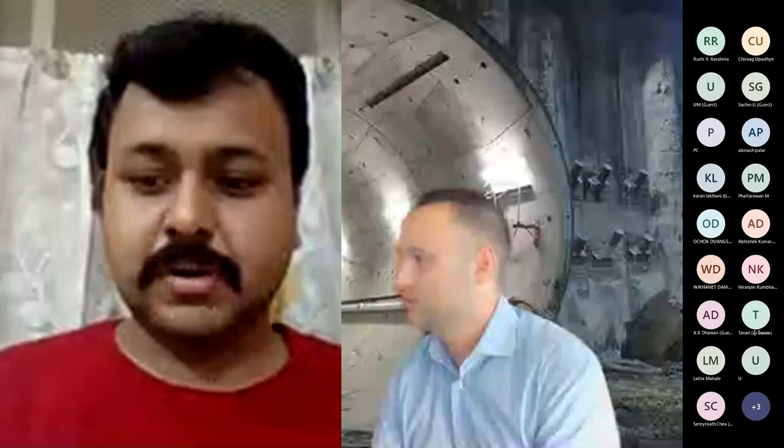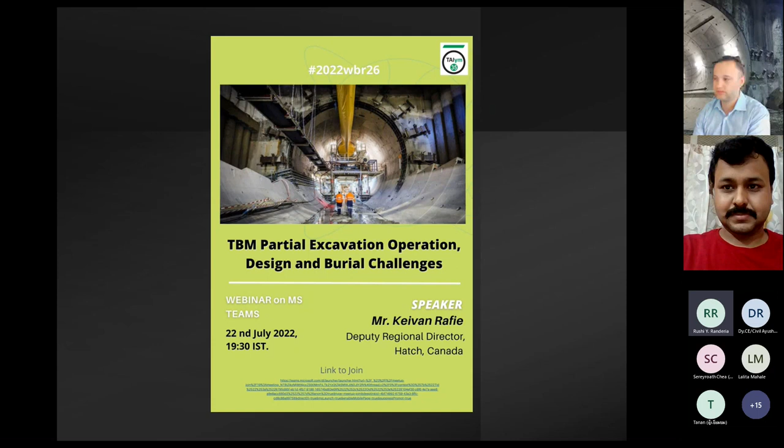So can we start, or should we wait a couple minutes? It's 7:37, so we'll start at 7:40. Oh wait, 7:37, only two minutes away. It's 7:37 PM IST because it's morning in Vancouver. Can you see the page at the moment? Yeah, the poster is visible, that's the title. I'll leave it on this.

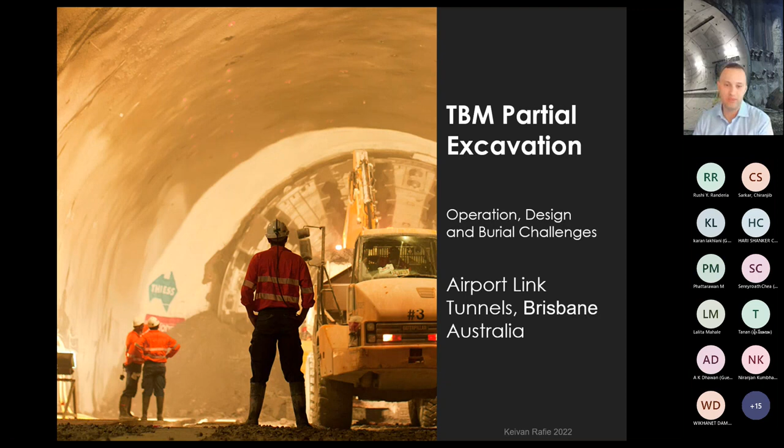Here is a nicer view of Brisbane downtown at nighttime. The south end of the project starts just behind these buildings.

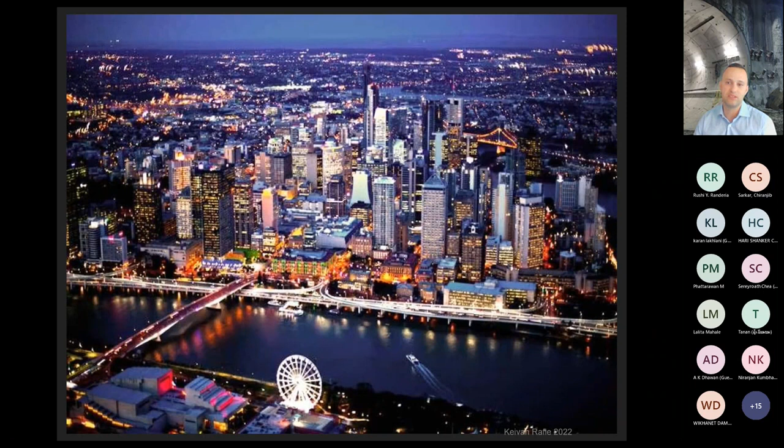In 2008, the government announced that the JV composed of the Macquarie Group, Thiess, and John Holland had been selected for the Brisbane Airport Link. The project involved a total of 15 kilometers of tunneling, including main road with 6 kilometers of twin tunnels, busway tunnels, and connecting on and off ramps, as well as 25 bridges, resulting in over 7 kilometers of new road.

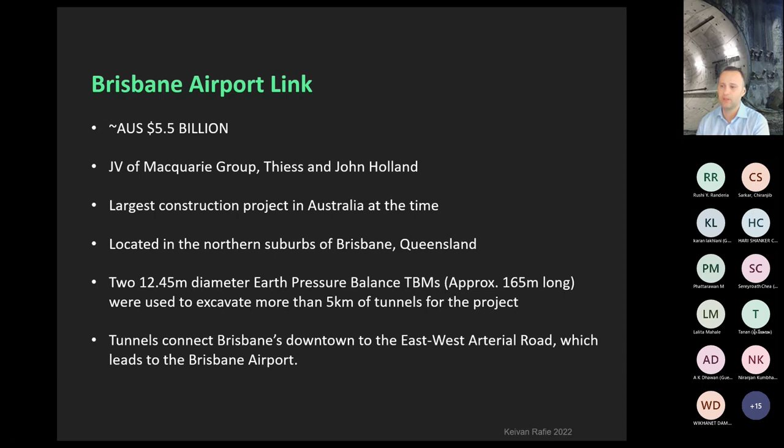Now, to focus on the title of this presentation, let's look at the area where partial excavation was performed. Here's the general map of the project. Bowen Hills in the south is just north of downtown, and Toombul in the northeast is where the airport is located.

Around the end of 2008, tunneling first commenced on the project with drill and blast excavation at Bowen Hills, and also road headers in Kedron for entry and exit ramps. TBMs were launched at Toombul to mine in the southwest direction, passing the North Caverns in the Kedron area, and finishing by breaking through the South Kedron Caverns for the second time in their journey.

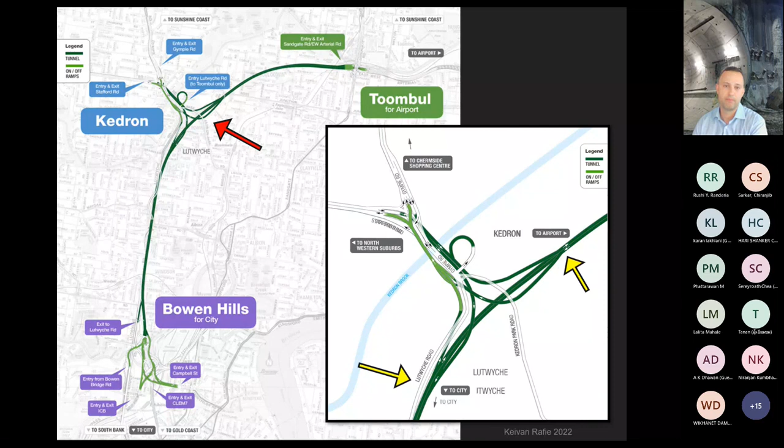Here's a 3D model of the North Caverns. As discussed, along the alignment, both TBMs were required to pass through the North Cavern at Kedron, which had been excavated through the sequential excavation method by road headers or drill and blast for the base, shown by the yellow arrow here. These large caverns were designed to connect the entry and exit ramps about halfway along the tunnel.

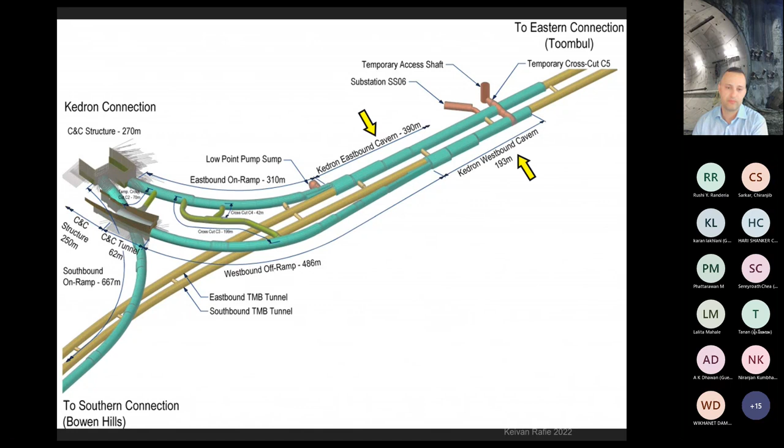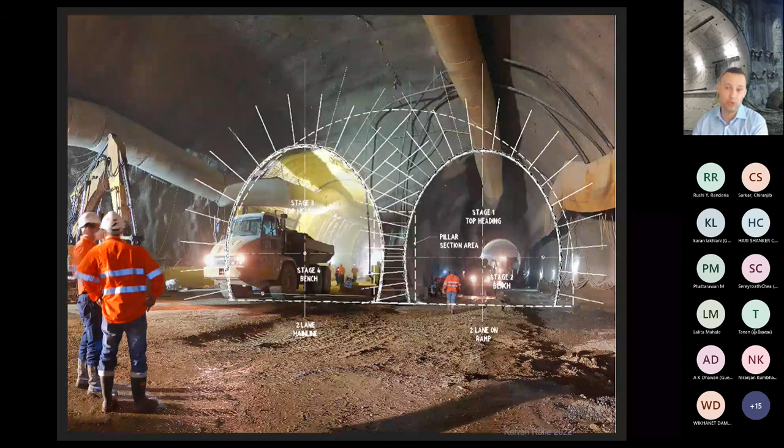Here is a view of a two-lane ramp joining a two-lane main line tunnel in the Kedron area. That's where people who want to go to the airport go straight, and if you want to take the off-ramp, you exit there.

Ground conditions for the TBM drives consisted of a fairly complex geological setting. It comprised alluvium, sedimentary materials, carbonaceous siltstones, and conglomerates underlain by a tuff called Brisbane tuff. The groundwater along the alignment comprised two main aquifers and stood around 35 meters above tunnel invert on average.

Each TBM was designed for 2.4 kilometers of tunnel excavation with a minimum curve radius of 750 meters and a working pressure of 4.5 bar.

The cutter heads had a bore diameter of approximately 12.5 meters and each weighed about 200 tons. The cutter head tools consisted of disc cutters for the hard rock portion of the drive, and scrapers and buckets to deal with the soft ground. The TBMs had 38 main thrust cylinders, 19 rams in total, with 2.8 meters of stroke and 90 meganewtons of thrust force.

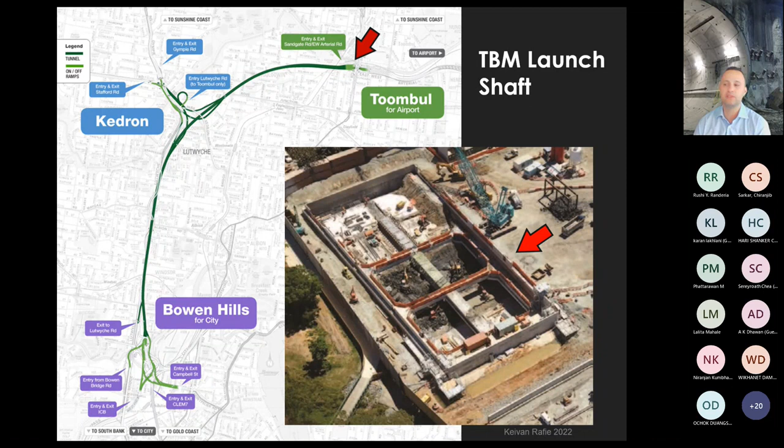The two TBMs began their approximately 2.5 kilometer long drive, going southwest from Toombul towards the Kedron cavern. What you see in the picture is the TBM just launched. About 200 meters of it has gone in, and you can see the last gantry, which is still very close to the portal.

Here's again the 3D figure we had before, now showing where the TBMs had to break through the already excavated caverns with the STM method, shown in yellow, and then where they needed to relaunch for the second round of full face excavation, shown in green.

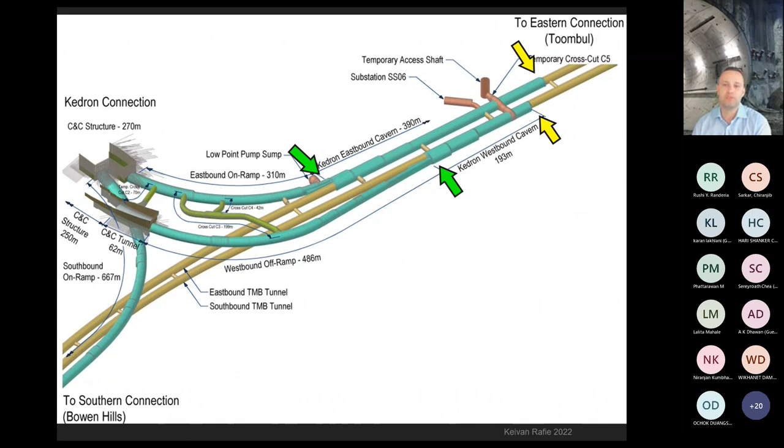The first option was to just slide the TBM through the caverns on the cradle and rails. Another option was to disassemble the whole TBM, move the parts, and then put the pieces back together. The third option involved partial excavation, which is the topic of this presentation, in which the TBMs would excavate the invert of the cavern.

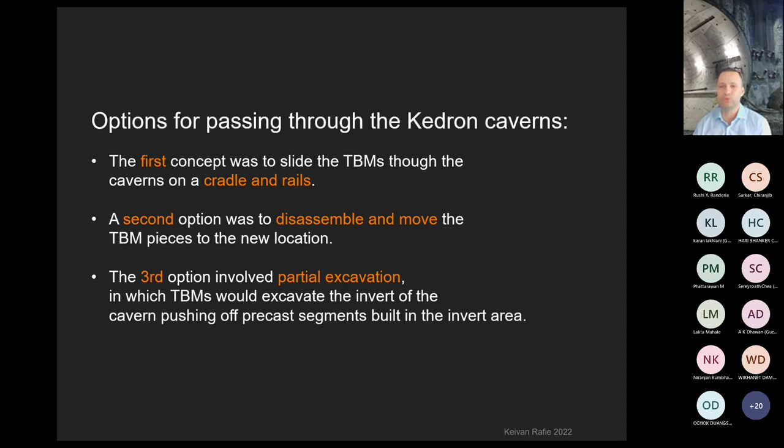So they could use their own rams to push off the precast segments, which were placed just on the invert, at the bottom, around the 6 o'clock position. After weeks of planning, risk, and cost assessment comparing the options, we chose partial excavation as the best method.

One of the major benefits and reasons for selecting this method was that we could lay down the road decks, which were supposed to be constructed anyway, and which would be used later as the utility tunnel for all the utilities and systems to go underneath, and also as a drainage path.

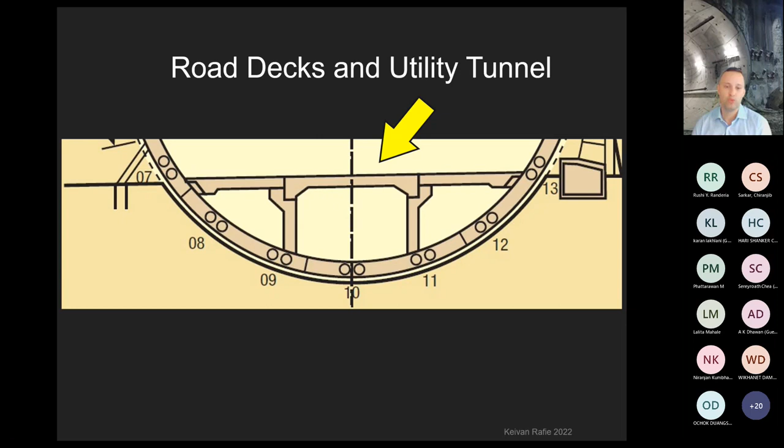Because we had to lay down those decks anyway and extend the utility tunnel, there was no interruption or difference compared to normal excavation. So it worked for us both ways.

To push and steer the TBMs, we had to install precast segments at the bottom of the curved excavated profile, as I said, so we had to design a sequence of half rings. As you know, the rings are usually universal, and then they go left and right. If you want a straight path, you alternate left, right, left, right.

We had to do the same thing for these half rings, designing them to go left and right. And because the cavern itself had some curvature too, we had to navigate that. This arrangement basically neutralized the taper and also let us go through the curves.

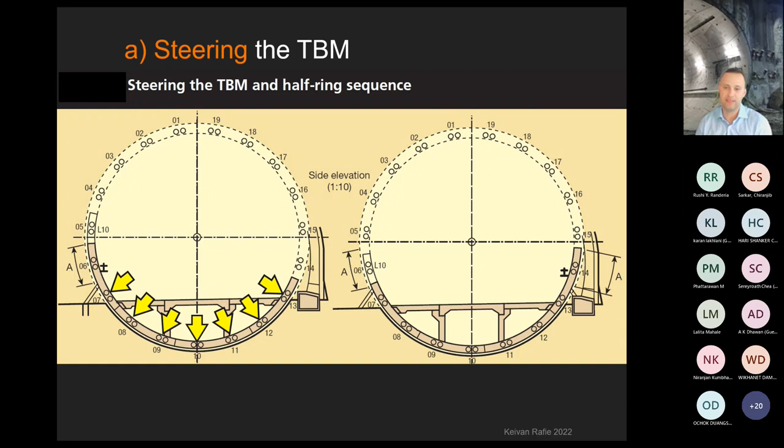As you know, normal TBM operation involves working with the TBM rams in groups. So we had to work with Herrenknecht electricians to modify the TBM software to say exactly which rams we want to push, and then group them separately to the left or right so we can navigate.

The other main challenge with the partial excavation was the chance that the TBM could potentially sink into the ground. This was experienced on some of the previous projects that tried that. So the calculation showed that the TBM needed the support, or minimum invert thickness, to stop the forces on its center of gravity from causing the TBM to tend to move downwards.

Additionally, a muck extraction strategy in front of the TBM required one-way rotation of the cutter head, because, as you'll see in the next photo, one side of the TBM has some room, and because the TBM cannot excavate itself, the material other than what's in the bottom of the screw - a lot of soil and muck - just gets dispersed around the TBM.

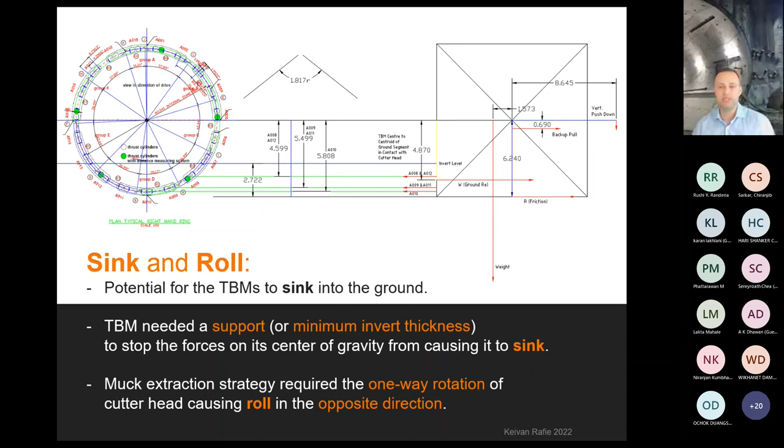So for these two reasons, we had to make some interesting modifications to the TBM. The first element was using a concrete curb, we called it, poured on both sides of the TBM along the cavern to resist the forces causing the TBM to sink into the ground.

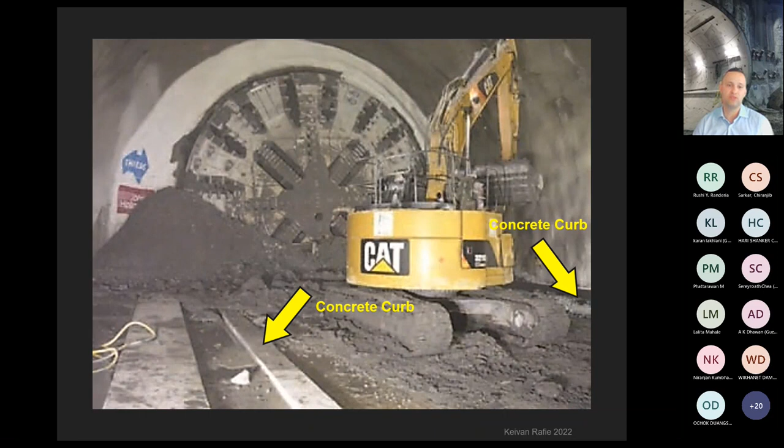The second element was a set of special anti-roll sink brackets, welded to the TBM shield, which could slide along the curb, preventing the TBM from sinking into the ground or rolling while the invert was being excavated. Because, as I mentioned, the TBM could only roll one way, all that scattered muck could be on the side where another excavator could come and load the trucks.

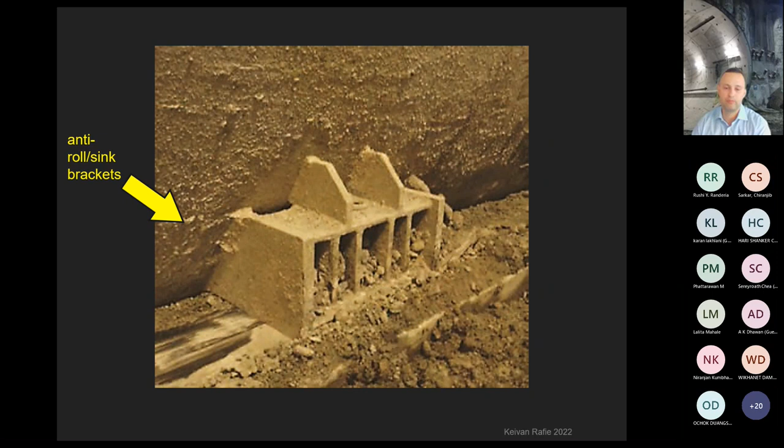Another concern with this arrangement was supporting or flying the backup gantries through the cavern, because the gantries would have to sit on the segments with some brackets, so the middle part of the TBM could move along these rails. These gantries by default move on wheels, and the rails were installed so they could be pushed forward.

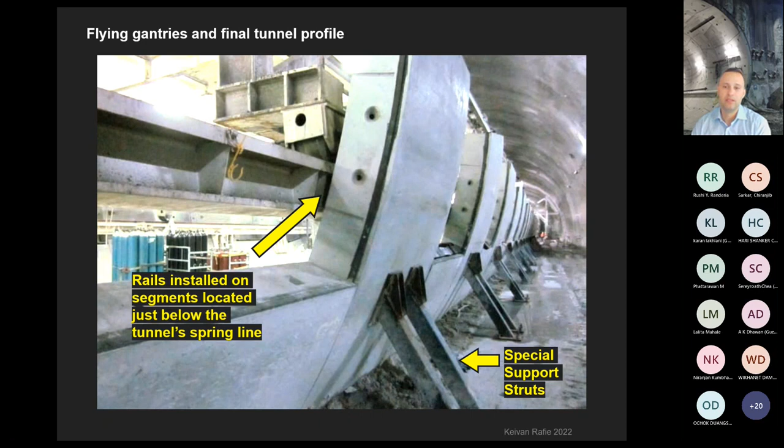With the partial excavation, the half rings were designed to be extended a little bit above invert so that for every second ring there's a place we can put those brackets so the rails can be installed and the TBM can move. So that was another design challenge.

Then after the TBM moved, the half segments needed to be cut to match the profile of the rest of the cavern, so we'd have the full invert of the tunnel for the cars to pass on in the future. Saw cutting of the segment was performed by mounting a horizontal rail on the previous and following segment, then using a circular saw to cut the segments with high precision.

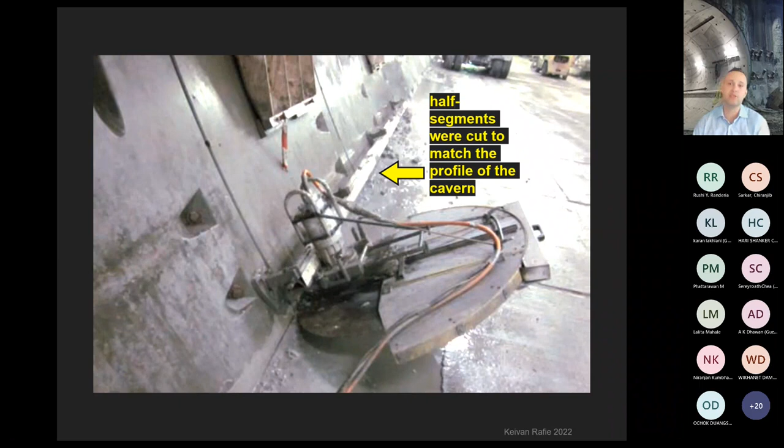My apologies, Vancouver these days is very hot, but they've never had this temperature before, so there's no air conditioning in 90% of the houses and apartments. So it hit us hard.

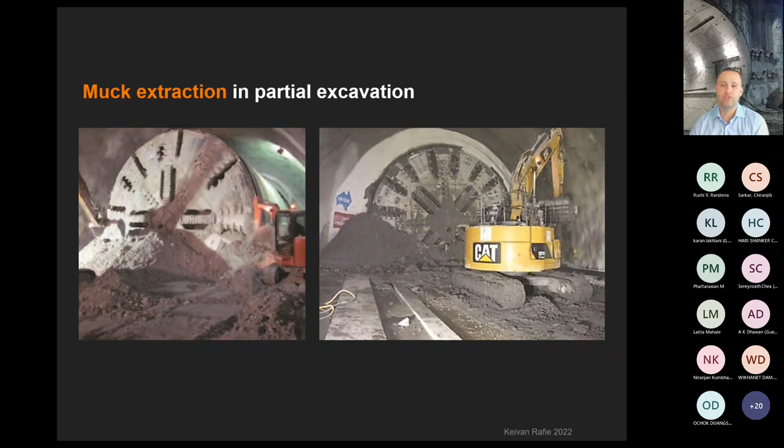All right, so the next slide: extracting the material in front of the TBM also revealed some challenges. The most important involved collecting the muck from the left and right side of the TBM. On the side closer to the cavern wall, the excavators had difficulty reaching material stuck between the cavern and the TBM. On the opposite side, the excavated material was dispersed widely, and the excavator operator had difficulty efficiently filling the buckets.

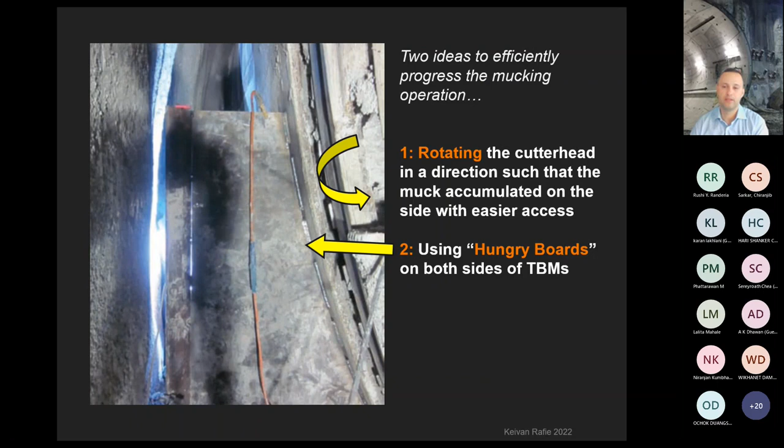So for that challenge, we had to propose two ideas to efficiently progress the operation. The first was rotating the cutter head only to the easier side for the excavator to take out the muck. The second modification was something we called hungry boards on both sides of the TBM, which basically pile the muck for the excavator operator to help load the trucks more easily.

The other interesting element was transferring the muck from the chamber of the TBM through the belt conveyor, because the cavern invert preparation and certain other operations on the connecting ramps needed to be performed as soon as the TBM gantry had passed the area. But the conveyor belt, which extended behind the TBM, was restricting access for the rest of the work.

So we had to elevate the conveyor, which we called at the time the flying conveyor.

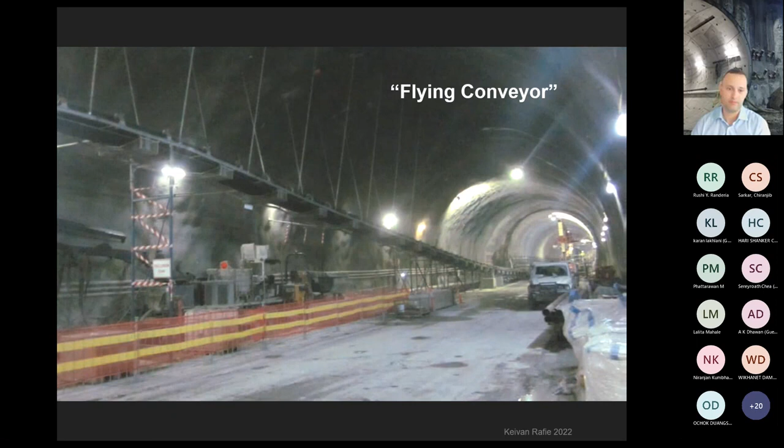Okay, so of course, not everything went smoothly. Just as we were ready to celebrate the end of partial excavation for the first TBM, with less than a few meters of the southbound cavern left to be excavated, the southbound TBM, or Sandy, became entrapped in the smaller pre-excavated relaunch profile. This is a pre-excavated profile that was originally mined by roadheader in advance to accommodate the design for the relaunch of the frame and other elements, so the TBM can start full face.

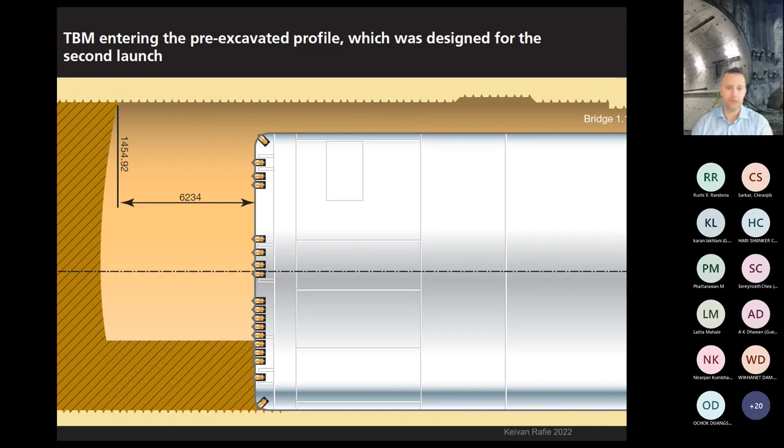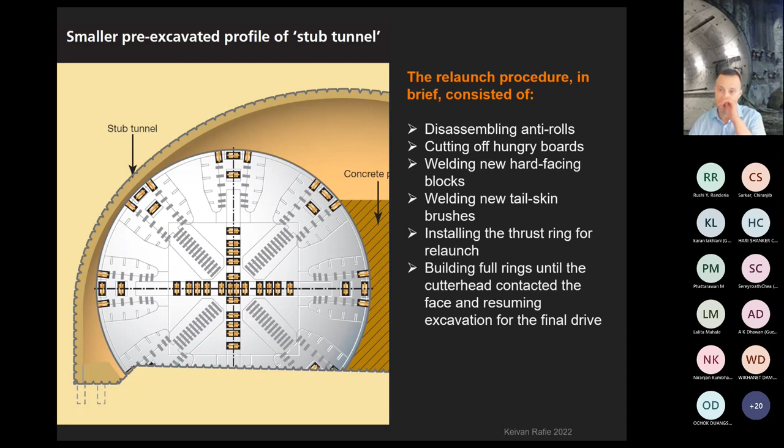The relaunch procedure, in brief, consisted of disassembling anti-rolls and cutting off the hungry boards, welding new hard-facing blocks and new tail skin brushes, installing the thrust ring for relaunch, building full rings until the cutter head contacted the face, and then resuming excavation for a final drive.

So the chain of events that led to the TBM jam occurred around ring 719. The TBM entered the smaller stub tunnel profile and was close to its final position for relaunch. The survey revealed that the TBM was slightly higher than the designed tunnel alignment, and the operator was asked to center the TBM before the cutter head stopped for relaunch preparation, so we could start exactly where we needed. Within a few rings of final position, the operator used a sharp overcut to return the TBM to center. At that stage, the top section of the TBM shield had a small clearance with the roof of the stub tunnel, and at the same time the TBM still had no back support other than those invert rams, so we could only exert 10%, 15% of the capacity. That was the reason for the jam.

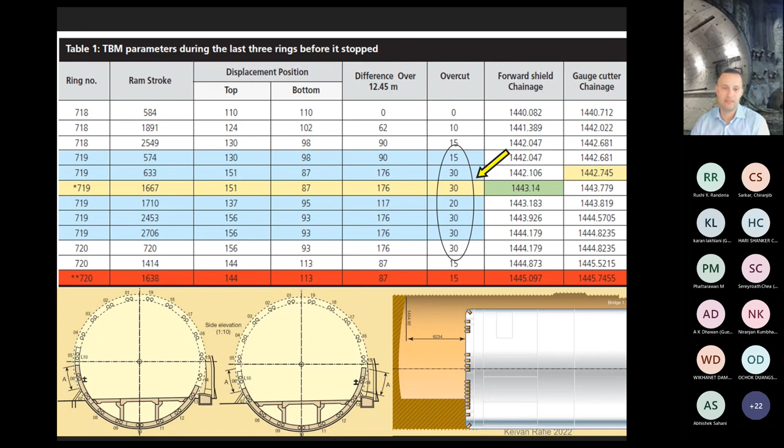So the friction after the top of the TBM hit the roof of the cavern is what stopped the TBM. Usually in typical projects, if you have a full face and all your rams, that would not have been a large enough friction to stop the TBM. But in this case, because we only had the bottom rams, the more we pushed, the TBM tended to go up and actually get more stuck in that area.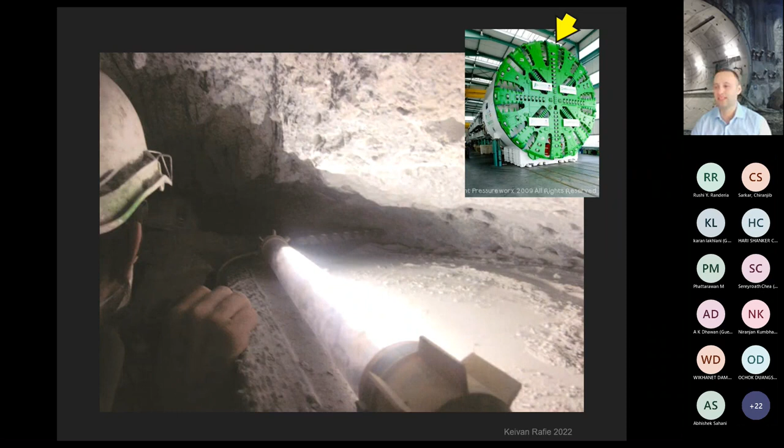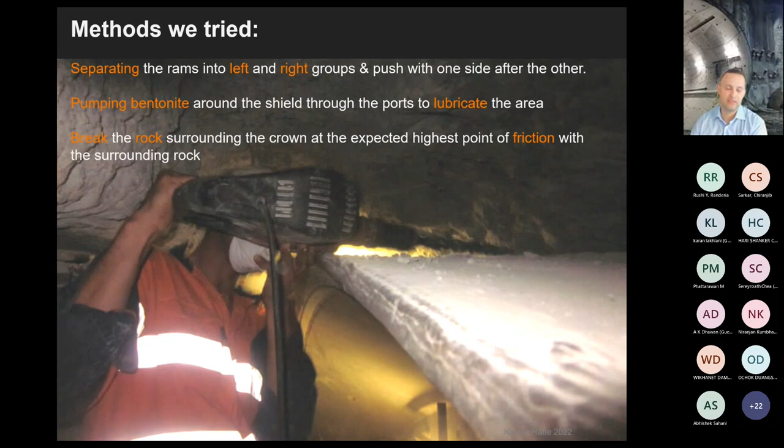So we tried using the available rams in the bottom section of the TBM to release it. The operators also tried applying maximum force to the left side and right side of those invert rams, just to jiggle it a little bit and see if we could free the TBM. We also tried to release it by pumping bentonite and jackhammering, but when it was clear that none of those would work, we had to think about something more serious, some other design solution. So we came to the conclusion that we had to be able to use the other rams of the TBM, both to get it aligned going down and also to push itself free from where it got stuck.

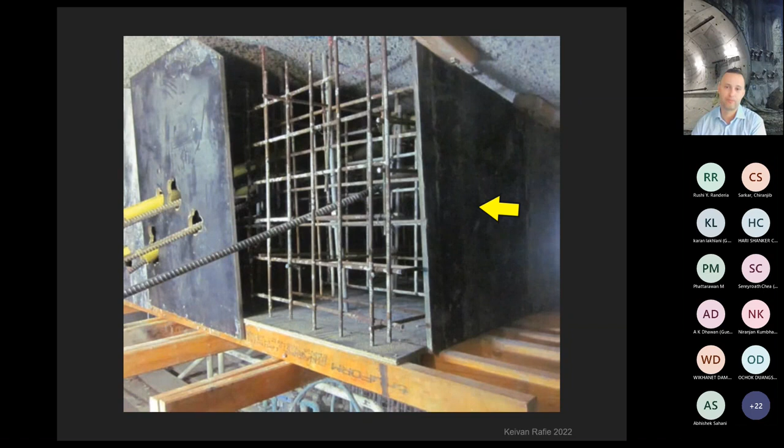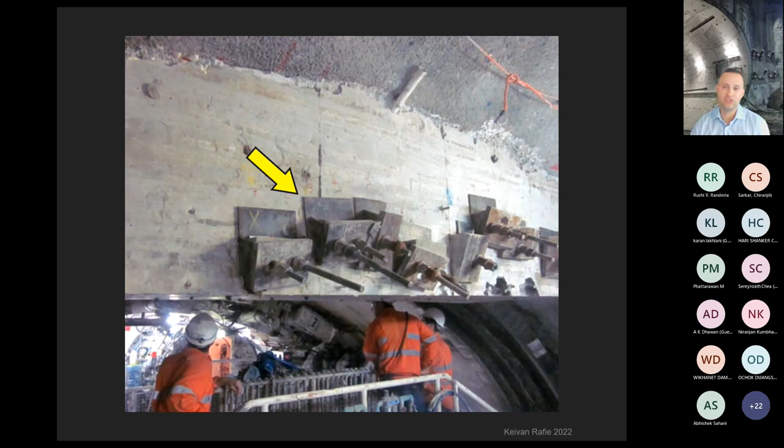So after all that, we came up with this block. This block of concrete was attached to the roof of the cavern with 12 steel bolts that were inserted deep into the rock at an angle, such that when the TBM applies force to the thrust block, the block will react in tension and transfer the loads into the ground. The thrust block was reinforced with rebar and poured with concrete after installation of the bolts. Later, when the concrete reached the required strength, all the bolts were pre-tensioned and tested for a minimum of 5 minutes at 100 kilonewton to verify installation quality and anchorage in rock.

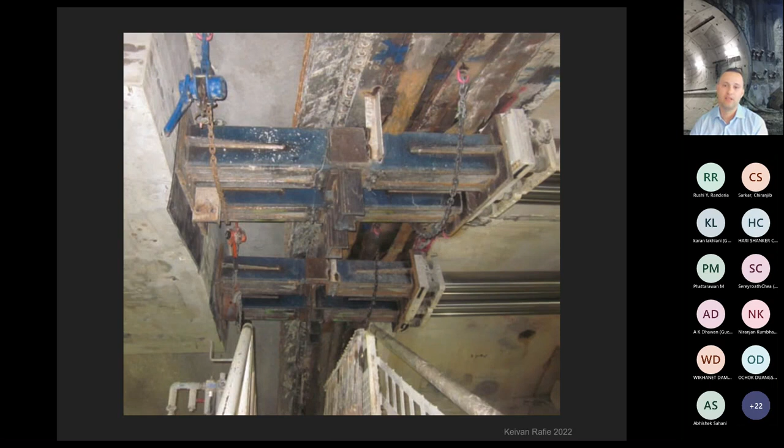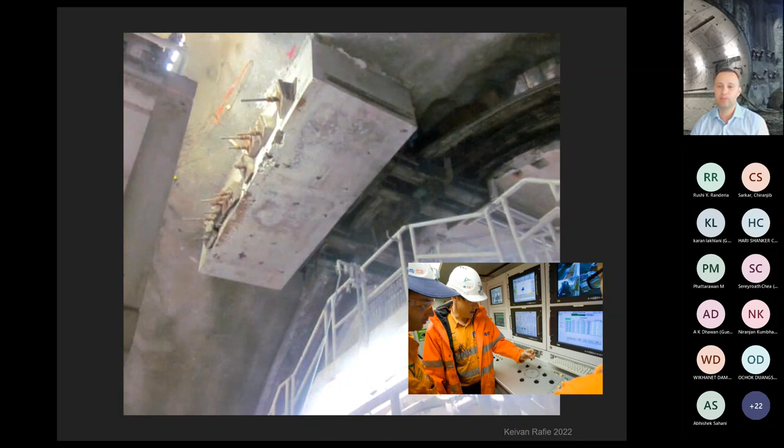Next, extension struts were installed to fill the space between the thrust block and the thrust cylinder pads. In this manner, the forces were shifted to the thrust block and then to the rock through the tension in those bolts. Once the installation was complete, the cutter head was retracted by approximately 100 mil, and the overcut was set to zero just to create the best conditions for release. The solenoids on the top rams were also reinstated, so we could use those rams at the top. And then, when we applied all that, we were successful in breaking the TBM free.

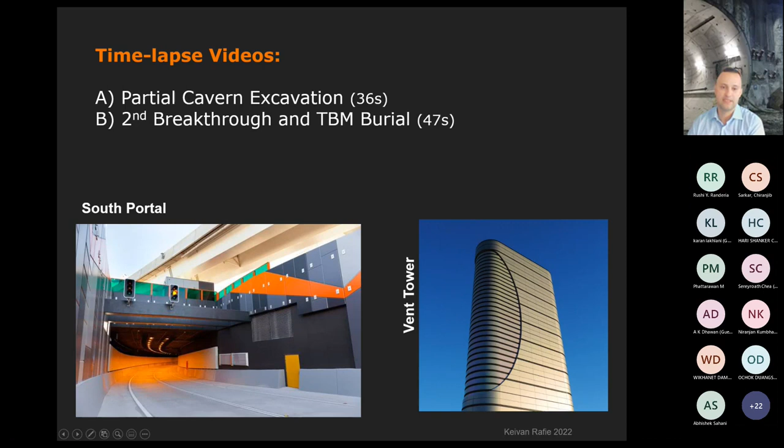So now I have two time-lapse videos. The first one shows the partial excavation in that cavern, about 36 seconds. The second video is something we didn't get a chance to talk about in this presentation, which needs its own presentation, but it's an interesting video of how at the end of the project we buried the TBM. Of course we took all the important elements out, but the shield of the TBM, it was cheaper for us to just bury it than to take it all the way out and torch it out. So with that, I hope you also get the sound, it's just music, it's a time lapse. Hope that's interesting too.

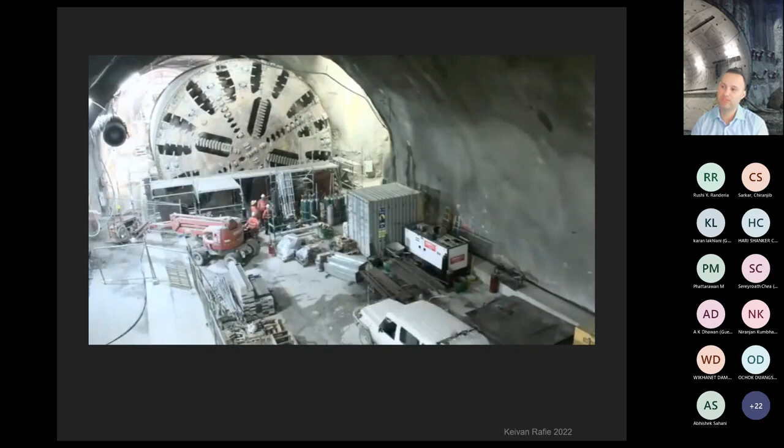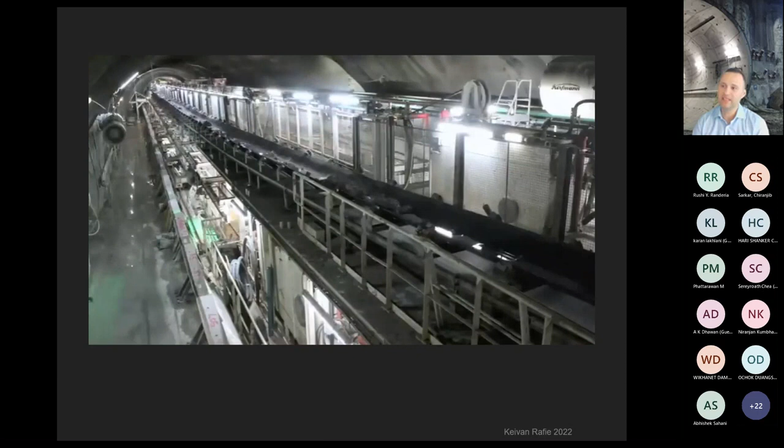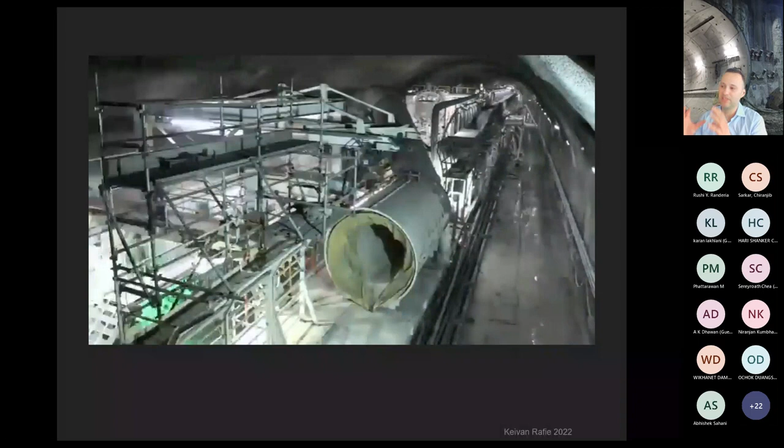So you see here, the TBM just came to the cavern. There's changing of cutters and maintenance. You see the excavator taking muck in front of it, and then this scene where the TBM goes into the tunnel. You never get to see that scene because it's very rare that the TBM is in another cavern that you can have that view. You see the half segments that are installed, then they get cut to get even with the rest of the floor, and at the end you just saw the chains for that flying gantry. The next one is the burial of the TBM.

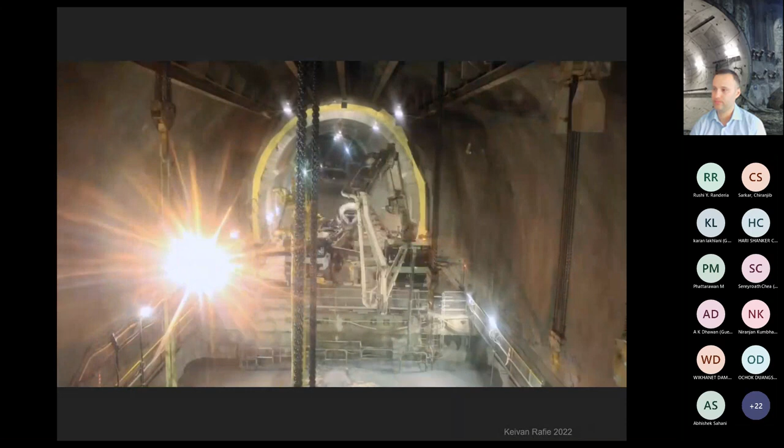And that's it. Thank you so much for your time, and happy to answer any questions you might have.

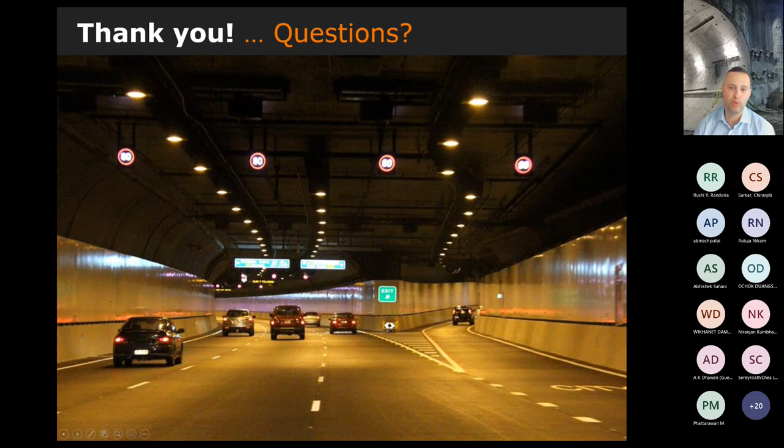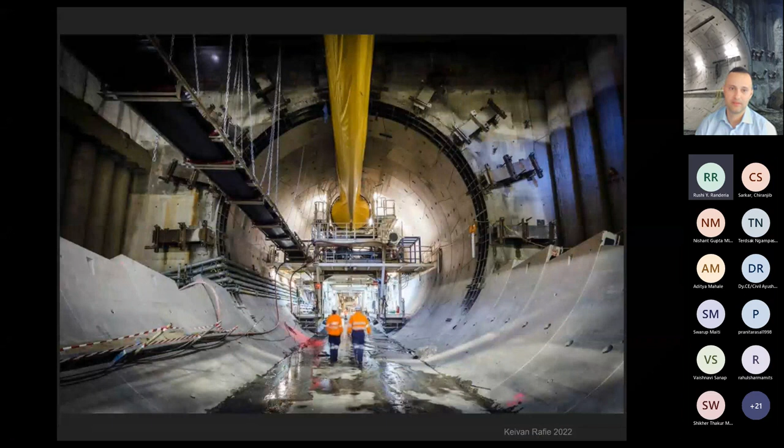Mr. Keivan, I have a doubt, just one informative question. What was the diameter and thickness of the TBM? The diameter of the TBM was about 12.5 meters, so almost like a four-story building. Yeah, three story, almost like a three story, I think so, you see there. And what was the proposed thickness of the invert segments? The segments were 400 millimeters thick, and you can imagine they were very... I think there were 7 or 8 pieces, and you can imagine the segments were really, really large.

So very specialized vacuums were needed for the ring build, they get very heavy. The segments were mostly fiber reinforced, but just the segments around the cross passages, because they need to take more load, we had full rebar in them. Okay, thank you Mr. Keivan.

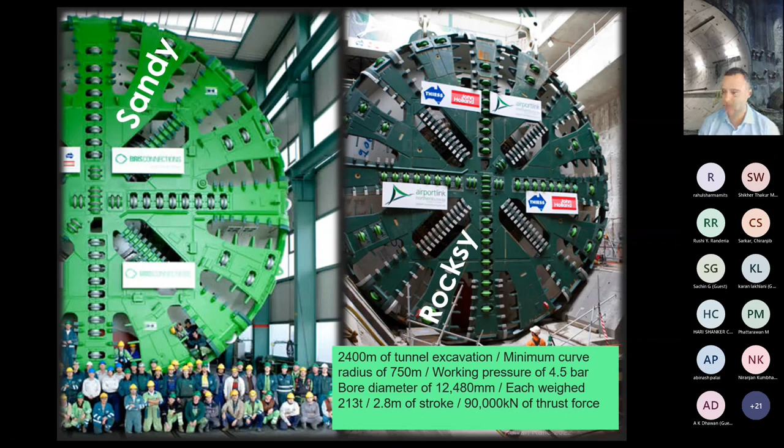So basically we are changing the cutter as per the strata encountered, correct? Exactly, yeah. But we knew exactly where we would need to, because there was a good geotechnical investigation program. We almost had boreholes every 50 meters. So it wasn't like we just faced it blindly, we knew exactly what we would have before we even started. So we were already ready for that kind of geology for our drives. Exactly, yes. Okay, thank you.